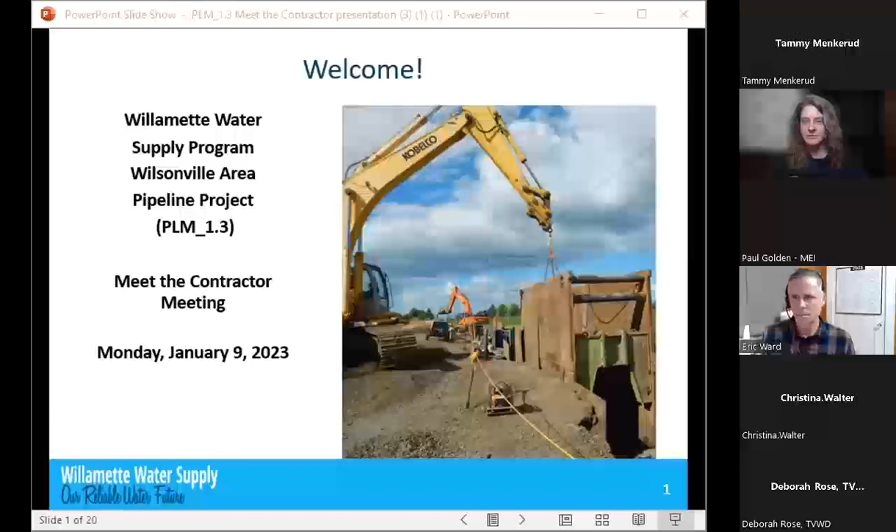Tonight we're going to go over a little bit about Willamette Water Supply, and talk about this project happening in Wilsonville. We'll cover the schedule of construction, traffic impacts, and everyone should be aware we're really focusing on the southern section of this project. We'll talk about what to expect during construction, how to stay informed, and if there are any questions, we'll address them at the end.

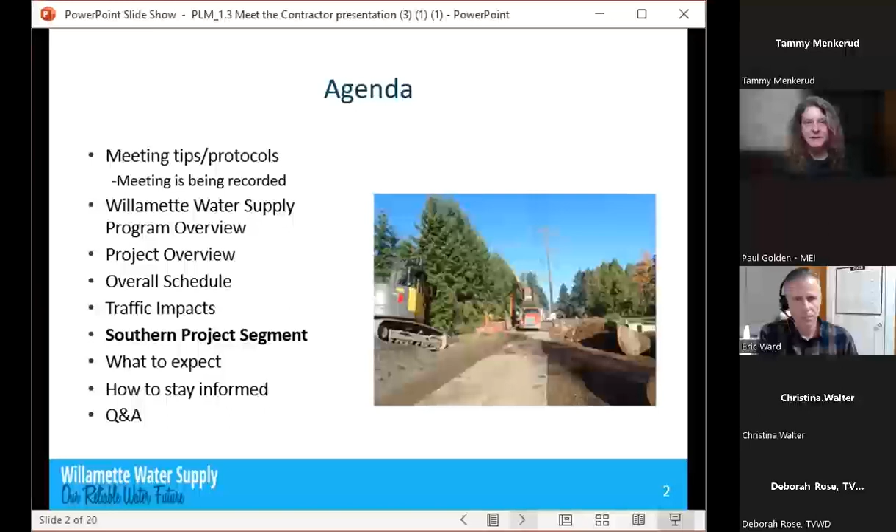In general, here we have Moore Excavation Inc., also called the MEI group. There's another slide where we'll ask Paul to give a little overview of MEI and the work they've done for Willamette Water Supply. As part of the project, we have Eric Ward, the project manager, and I'll let Eric introduce the Willamette Water Supply folks, and we'll have Paul go through his list of staff members as well. Paul, do you want to go ahead with your list of staff?

Sure, Rose. MEI has a very well qualified staff that we're all excited about for starting this project. Myself, I'm Paul Golden, senior project manager for the job. Diane Herbert is a project manager on the project, and Alan Chu is a project engineer. We also have Taylor Rice, who is our project engineer, and Scott Medley is our superintendent.

From the Willamette Water Supply side, I'm the project manager for the pipeline through Wilsonville. Jerome Deletsky, who isn't able to join us today, is the construction project manager, and Benny Bitts is the day-to-day construction inspector. The manager of the program construction efforts all across the program is Andre Tolmay. And of course, we have Tammy Menkerud and Marlis Mock on as well.

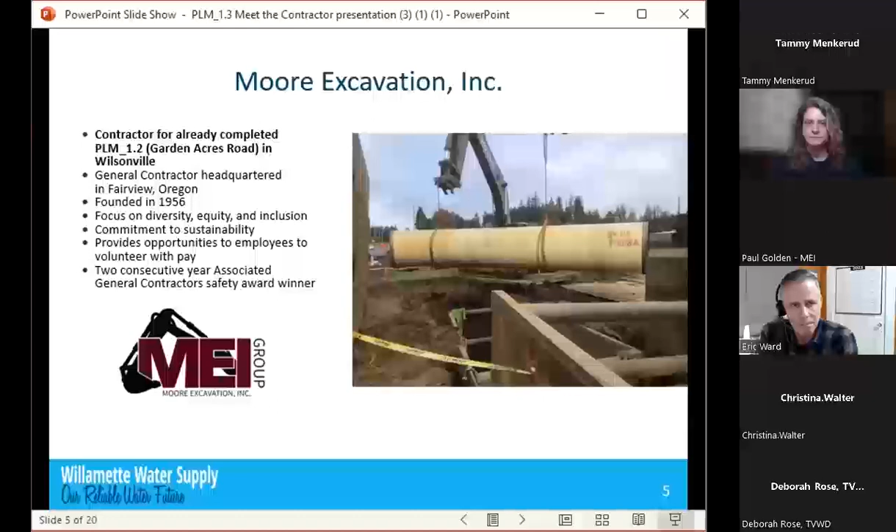Moore Excavation has had a really good working relationship with the Willamette Water Supply Program. We've done multiple projects with them, put in thousands and thousands of feet of water line for them, and we've had a great working relationship and a successful one on both sides. We've done work in Washington County, City of Wilsonville, City of Beaverton, and all these partnerships have really worked well. We've built some really good relationships from all of this work, and I think it's been a great boost to the local economy. Moore Excavation really is looking forward to this project.

Excellent, thank you. So just a little bit about the Willamette Water Supply Program. This effort began more than 10 years ago. It's a partnership between the Tualatin Valley Water District, the City of Hillsboro, and the City of Beaverton. In 2026, we'll provide a cost-effective, reliable, and resilient water supply system that benefits current and future generations of our communities.

The entire project includes an expanded water intake in the Willamette River in Wilsonville, marked number 1 at the bottom of your screen. Number 2 is a new water treatment plant being built in Sherwood. Number 3 indicates there's 30 miles of large diameter pipeline that is largely in Washington County, but some in Clackamas County. Ultimately, 2 large water storage tanks will be built on Cooper Mountain, one of which is already under construction now.

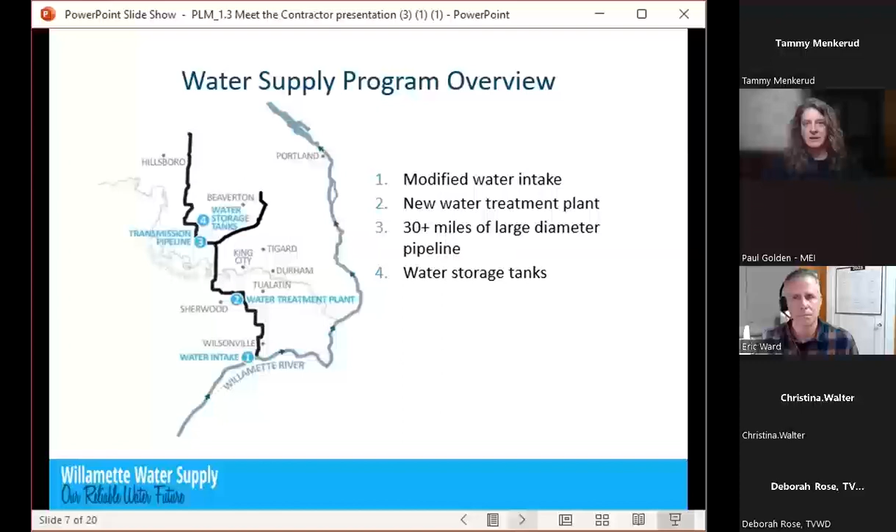So I'm going to have Eric jump in here and talk about our partnership with the city of Wilsonville and other project elements. Eric? Thank you.

This project, the PLM 1.3 project, is a third phase of the PLM 1.0 project, which means the pipeline main 1.0. It's our southernmost pipeline for the Willamette Water Supply Program, and in the main context of building it is that it's all within the city of Wilsonville. And with Wilsonville, we have a ground lease agreement that allows us to construct within the city's right-of-way, and with benefits to the city in addition to our agreement.

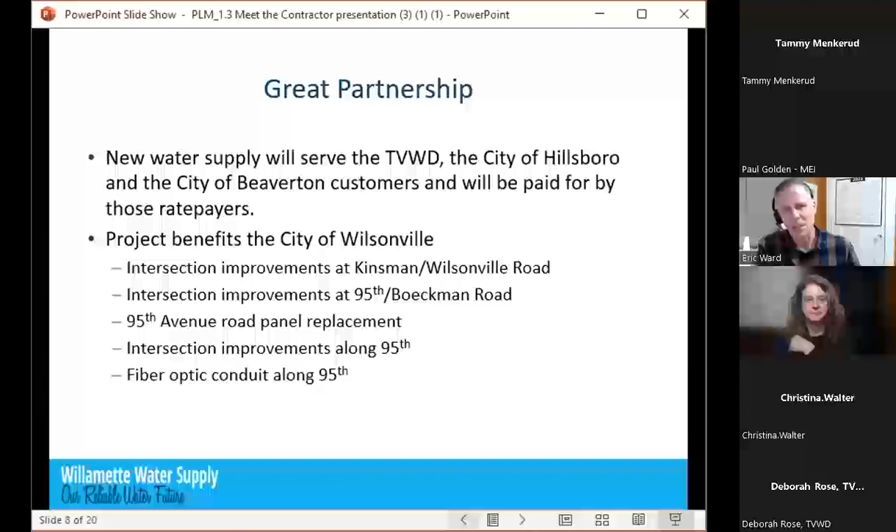We are leaving behind some intersection improvements and other public works improvements for the city along our alignment. That includes an intersection improvement, a right turn lane at Kinsman and Wilsonville Road, plus other intersection improvements, similar right turn lane improvements at 95th and Boeckman Road, and we're replacing road panels and doing other improvements on intersections and street lighting.

The focus for today's meeting and where MEI is going to get started is Southwest Kinsman Road construction, about a half-mile pipeline within the Kinsman Road right-of-way.

There's also in their permitted scope right now trenchless crossings of Wilsonville Road as well as Boeckman Road. I'll start out with the trenchless crossing of Wilsonville Road - that's about 160 feet of trenchless 84-inch auger boring. They will be putting in an 84-inch casing that they will put our 66-inch diameter pipeline within. MEI is also establishing their staging area and prepping for construction currently.

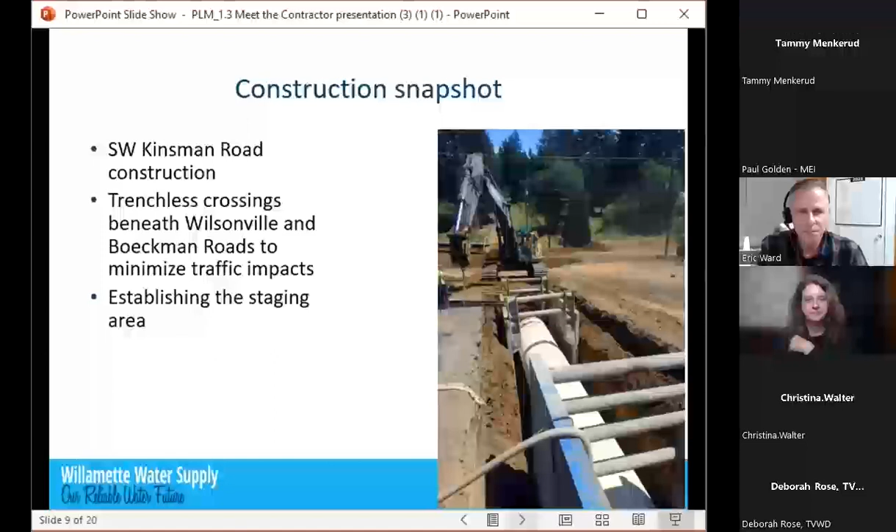At the south end of the project, we have a pipeline that was built on the Willamette River water treatment plant at the city of Wilsonville's property. That was from the intake to our PLM 1.1 pipeline, which is the first phase of the pipeline that I've been managing. That was finished a couple of years ago.

And then north of town, PLM 1.2 was completed a couple of years ago as well. That was a partner project with the city of Wilsonville as they constructed their Garden Acres Road project. MEI completed that project. PLM 2.0 was the very first project, completed in 2019, and that was also a partner project with the city of Wilsonville.

So we're filling in the gaps that are left over within the city of Wilsonville, and that includes this south portion of Kinsman Road, PLM 1.3 south - that's about a half mile. And then north, PLM 1.3 is about 1.7 miles of pipeline, and Boeckman, Ritter, and 95th Avenue.

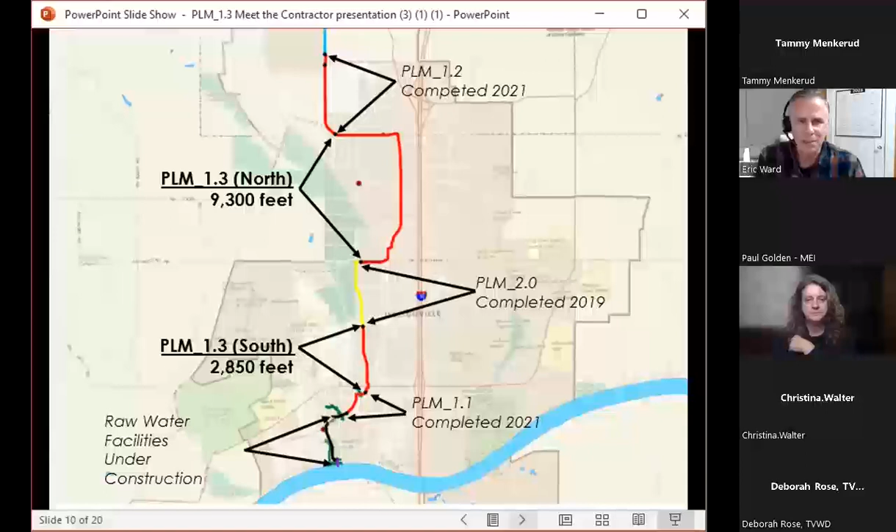This next diagram here coming up shows the same segments, with the 2 segments for our project, PLM 1.3, highlighted in red. Again, it's 66-inch diameter pipeline, welded steel, and it's 2.2 miles in total. We have the south segment and the north segment that I just discussed, but today our focus is on the southern segment.

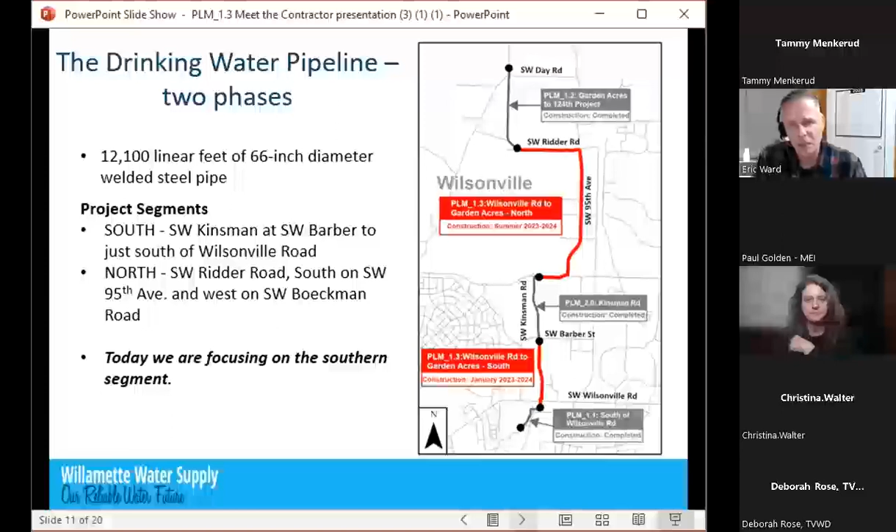The overall construction schedule is subject to change depending on weather and many other aspects of construction. We have the south pipeline, which is starting construction now, and it'll run through early 2024. The north section will start in the summer and run into the end of 2024.

We anticipate late 2024 for substantial completion, which means our pipeline will be able to be put in use as we finish up the punch list. MEI finishes the punch list, which brings us to final completion in the spring of 2025. So by the end of 2024 or early 2025, we'll be able to pump water to the city of Sherwood, or to our treatment plant located in the city of Sherwood.

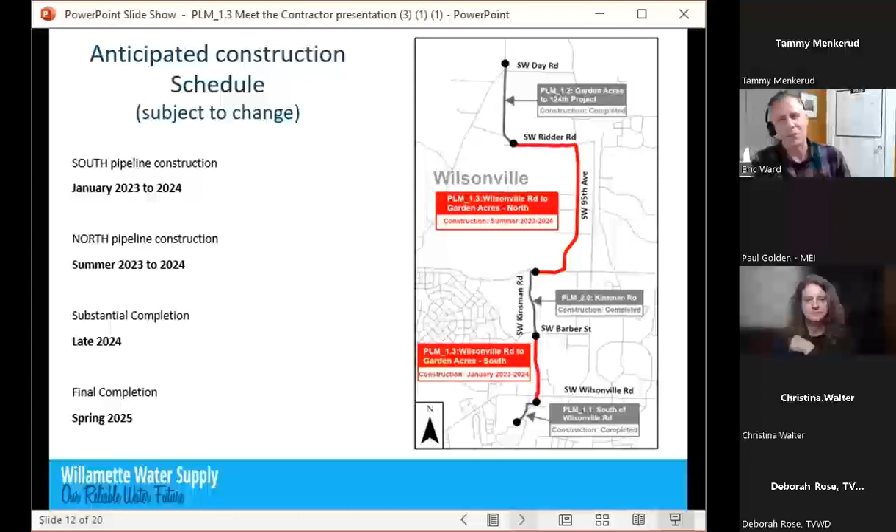So some things to expect during construction: work hours will be Monday through Friday, 7 a.m. to 5 p.m. MEI will be able to work between those same hours on Saturdays with permission from the city of Wilsonville. No Sunday work is allowed.

Some of the early work will be tree cutting on Kinsman Road and some on private property. There will be lane closures necessitating road detours, short-term driveway closures, traffic delays, bus stop relocations, bike lane closures, and heavy equipment and materials located in the easement areas on private property. Flaggers and detour signage will be used to control traffic, and there will be anticipated noise, dust from typical construction, as well as vibration.

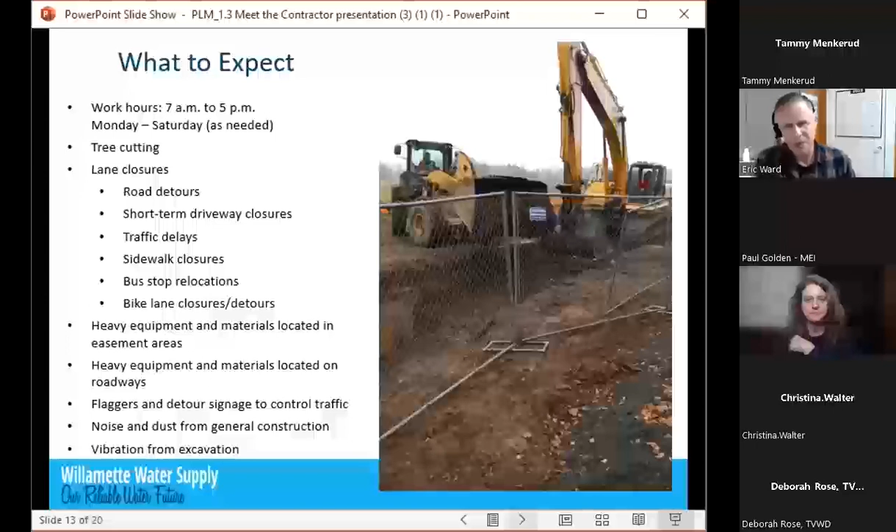This is a sketch of the typical pipeline cross-section installation, showing what it entails. This is on Ridder Road, where we're centering our 66-inch diameter pipeline within the right-of-way. We'll be avoiding a storm drain and a water line on the right side of our excavation heading west, and also avoiding the PGE higher voltage and medium voltage lines on the left side of the road. This pushed us to be in the middle of the right-of-way, which brings its own traffic control challenges, but which we've worked out with the city.

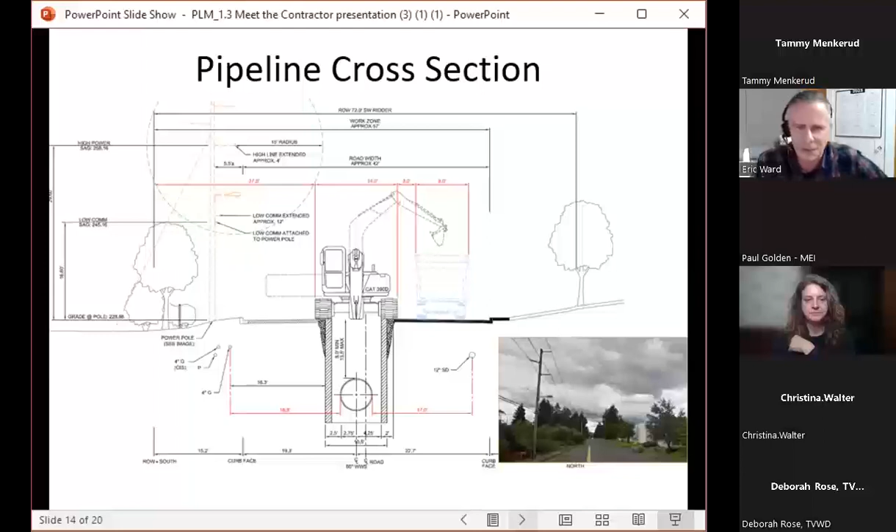Traffic impacts will change over time as the pipeline is constructed and the road is paved behind us. We expect traffic delays starting this month for the construction of Southwest Kinsman Road, and the way traffic detours will vary as construction progresses.

For this first couple of months, we expect to center our construction traffic control efforts around the fire station. When they start on Kinsman Road at the south end, we'll have the north lane closed. Any through traffic on Kinsman Road will be southbound only. There will be no right turn onto Kinsman Road from Wilsonville, or left turn allowed, so that'll cause all northbound traffic to detour through Boone's Ferry Road and around.

Then in the summer of 2023, when we set up for 95th Avenue, there will be a whole different detouring scheme that we will communicate with the public.

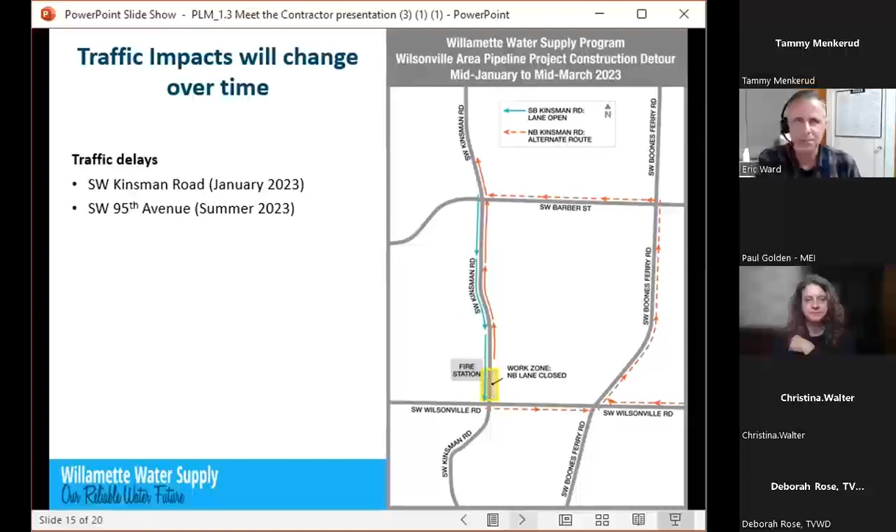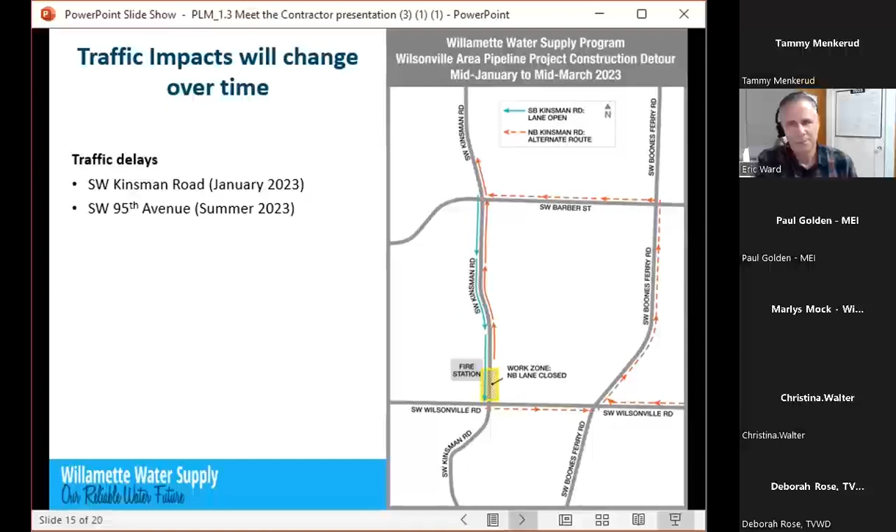I just wanted to point out that the time frame at the top of that map is important for folks to pay close attention to, to make sure they're looking at the right time frame, because these will change over time, and we'll be producing new maps as the project progresses.

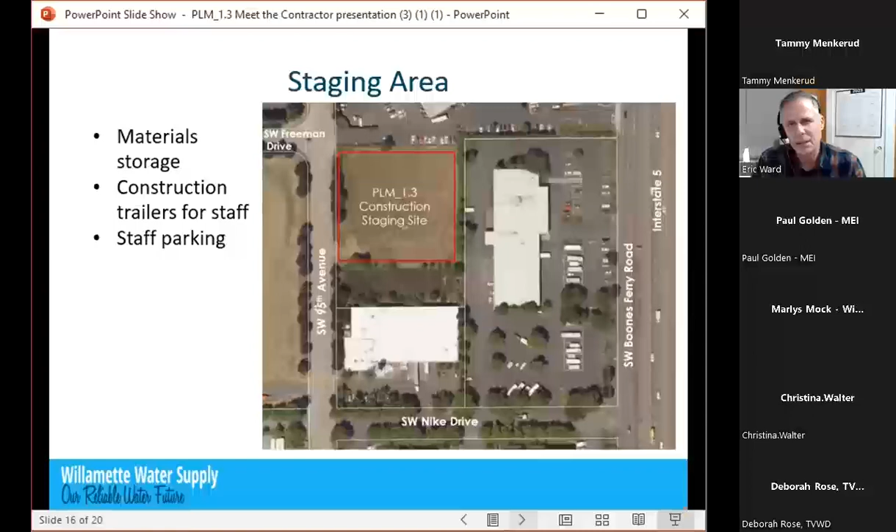To help with the construction effort, we acquired a staging area from Tonkin Wilsonville Nissan, from the property owner of that facility. MEI will use it for material storage, construction trailers for staff, and staff parking, located on 95th Avenue near Freeman.

If folks haven't signed up already, we encourage people to sign up for construction updates through our website. Those monthly email updates are the best way to stay updated with our project. We will also be in direct touch with folks whose driveways will be impacted by construction.

Again, we'll be in touch with people as we proceed with the project. We have a really robust project website, and the hotline is a great place to go if you have questions or concerns. We will also be holding a Meet the Contractor Part 2 for the northern section of the project, later on in 2023.